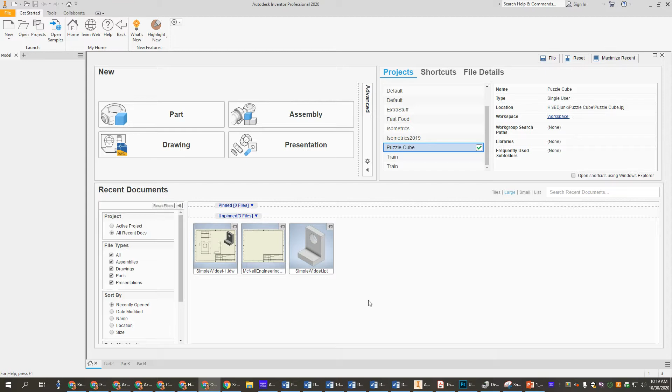Today we're going to work on setting up a multi-view drawing in Inventor. If you're back on your home page and you've already drawn all your parts, you want to now do a drawing. Do not open from this, it'll give you the wrong drawing sheet.

We have a special one here for McNeil. So you can go up to the top where this little piece of paper is, click on that and you'll get this window. You want to go down to here. Mine says McNeil Engineering Sheet A, yours might just say Engineering Sheet A. Select that and create, and it's going to ask you all your things here.

So it's going to ask you your name, so just type in your name. I grew up learning that you should always do capital letters when you do drawing sheets, so I do that. Not everybody does. This is the puzzle cube project that we're working on in this case, but yours might be anything. And then part name, in this case, maybe I'm just going to do my orange part.

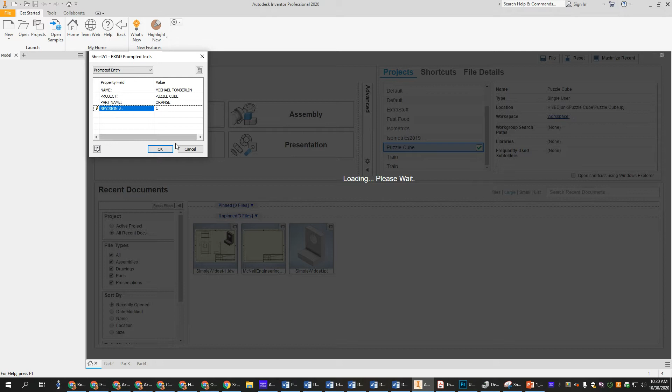Now revision, this is our first time, we didn't redraw anything, so it's just revision 1. Pretty much will be all year long for you. And you click OK to anything that pops up, and it does your drawing sheet. And look, it put my name and the project and the part name already in the corner.

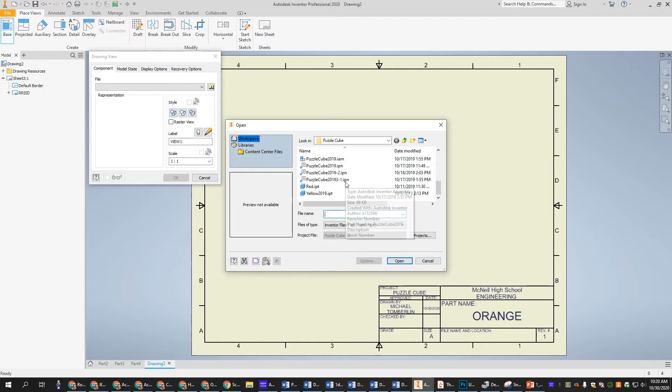From here, you're going to click on Base, and then you're going to go select your document. Okay, we have to go pick where that file is. So you have to go back to your H drive, but I'm already in Puzzle Cube, so it usually just finds it. And then we just have to find, do I have an orange part in here?

There's an orange part right there. I open up my orange part, it automatically brings it in. I can move it around. It's the front view that brought in, so I'm going to put it down in the lower left.

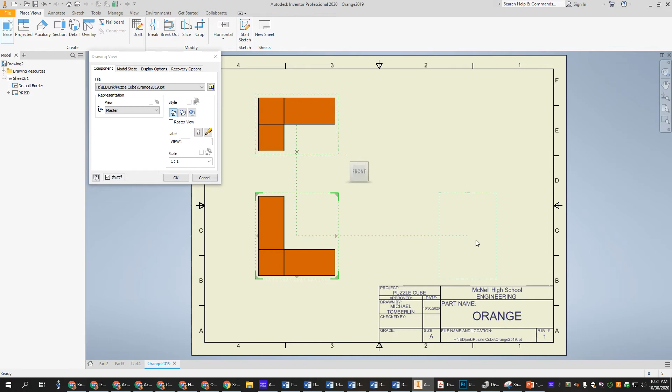From here I just take my mouse up. I don't click on anything, I just move my mouse above, then I click. Then I take my mouse over to the right, then I click. And that's done the top, front, and right, that easy. And then if I go up in this upper corner and click, it puts the isometric.

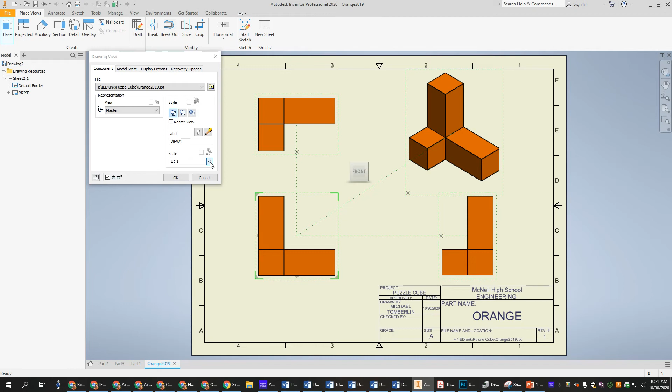Now over here, we want to make sure we have hidden lines that show, and we do not want it shaded yet because we're doing two-dimensional. If we can do scale 1 to 1, that's great. If it didn't fit, and it should fit for all the puzzle cube parts, we could change the scale. And you just click OK. And there you go. There's my orange part.

Now we do want the three-dimensional to be shaded. So if we hover till you get the little red dotted line, and you double-click on that, it'll bring that window back up, and you want to click the far right one where it has kind of the blue circle in it, where it says shaded. Say OK, and now it's put shading, right? So you must have tonal shading on three-dimensional views.

If one of your views happen to end up down here, or it's over the top, or you squished them all together, you can see how I'm moving things. You just hover over it till you get that little red dotted line, and then you can move it around. Now the best part, look how the views stay right on top of each other, right? We can't move them. So all this alignment that we've been focusing on in class, you can't mess it up in Inventor. And that gets you done.

Hit save. Save it as an IDW, which is a drawing, and then move on to your other parts.